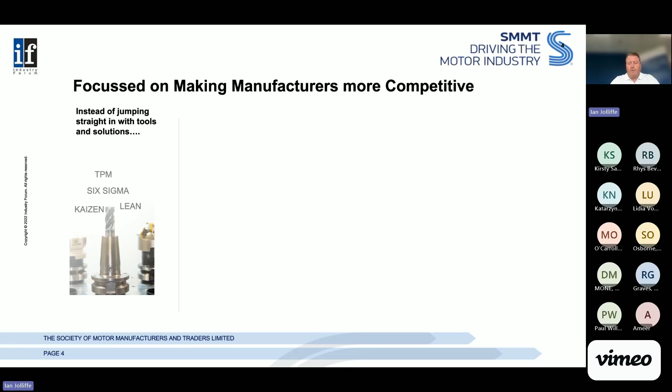So, as a business, our business is focused on making manufacturers more competitive. The kind of tools that we use include Lean, Six Sigma, Kaizen, TPM, but we don't just train in those. Our main focus is to look at how we can use manufacturing as a driver for competitive advantage, looking straight through from the beginning of the process, the competitive strategy and the management systems supported by new product introduction and lifecycle management, getting to grips with the manufacturing operations, and also looking beyond that in terms of the supply chain. So understanding our business suppliers and also measuring outbound logistics and customer satisfaction for business improvement.

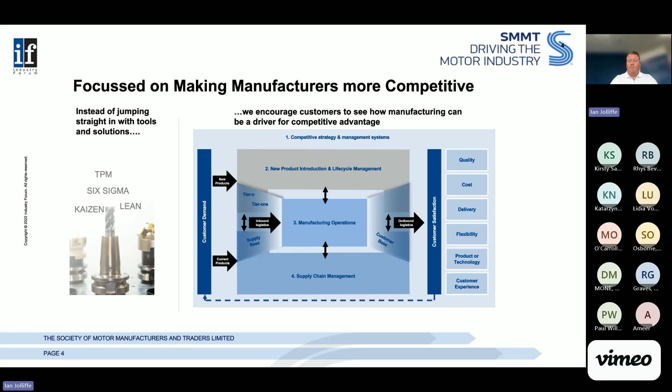As a business, we have four main capabilities: competitive strategy and management systems, new product introduction, life cycle management, manufacturing operations and supply chain. Whilst we provide consultancy and training, the key thing for us is on top of people learning new skills, it's the actual coaching and implementation of those skills to provide business benefits. So it's working with organizations and individuals to make sure we go beyond the issuing of certificates and transfer of knowledge, but also support them through the implementation to make their jobs easier and ultimately their businesses more effective.

And obviously, as a business as well, we are very much involved in the IATF 16949 and VDA quality systems, training and auditing. A number of areas that we deal with, from VDA to IATF to APICS, and as Industry Forum, we deliver consultancy and training under the Quality Management Division brand.

Now, if you're running a manufacturing business in the UK right now, you don't need too many headlines to tell you that times are tough. In the last 5 years, minimum wage has risen in the UK by 40%. Electricity has more than doubled. Gas has more than doubled. Changes to national insurance make it more expensive to employ people. And there's similar disruption and challenges associated with raw material supply, fuel costs, waste disposal, business rates. All of these things tend to be going in one direction and it isn't down.

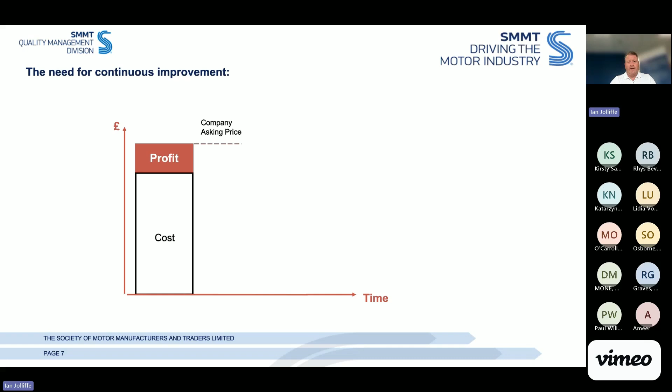Unfortunately, most of us live in a position where the products or services we provide are subject to competition, both domestically and internationally. And as a consequence, instead of a cost plus type discussion we have with our prospective customers, quite often it's a cost down discussion whereby there are other companies in or around the world that say they can do what you do for the same sort of money, which has the effect of depressing the price.

Now, in order to make similar levels of profit, we need to address our costs. And this is what this is all about, trying to understand where our costs are and what we can realistically do to manage them. Going forward, the general price pressure tends to be downward. So people generally want to pay at least the same as, if not less than they did last year for the same goods or services.

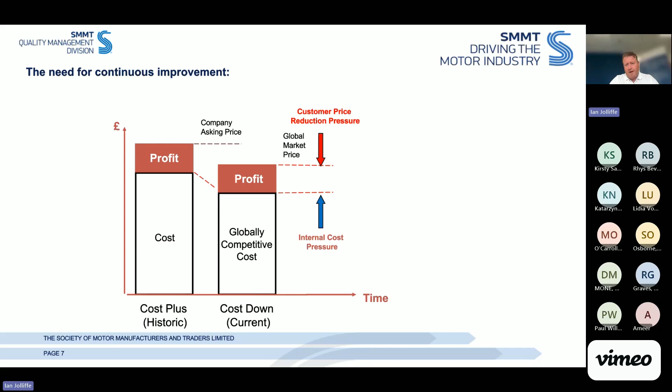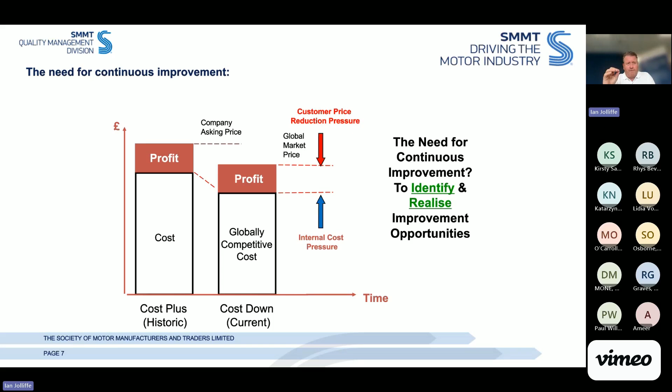During that time, our internal cost pressures rise. We talked about the increase in national minimum wage. We talked about the increase in utilities, gas, electric, fuel, all of these sorts of bits and pieces. So that is where all of our margins come under significant stress. And the need for business and continuous improvement is to help us identify and realise improvement opportunities. That is the very crux of what we do, particularly within operations management.

Our common approach was developed in the late 1990s through, at the time, the only time that Honda, Nissan and Toyota worked together. So what we did over a period of years was develop a common approach based on the Honda, Nissan and Toyota production systems, which basically is summarized by a little temple of continuous improvement here. The Plan, Do, Check, Act cycle, the Deming Wheel continuous improvement cycle, is fundamental to what we do, but so are the building blocks: at the very foundation, 5S, 5C, or workplace organization, supported by process analysis, 7 or 8 wastes, supported by visual management and standardized work.

Now, we focus on these because regardless of the industry that you're in, these building blocks will have a significant impact on your ability to control and improve your processes. And as an individual, I've worked across automotive, aerospace, ceramics, vehicle recycling, food industry, all of these places. All of them are very much applicable when it comes to workplace organisation, process analysis, visual management, and standardised work. So these bits work wherever you go. There are some specialist bits relating to maybe problem solving, line balancing, setup improvement. All of those build on these 4 basic building blocks.

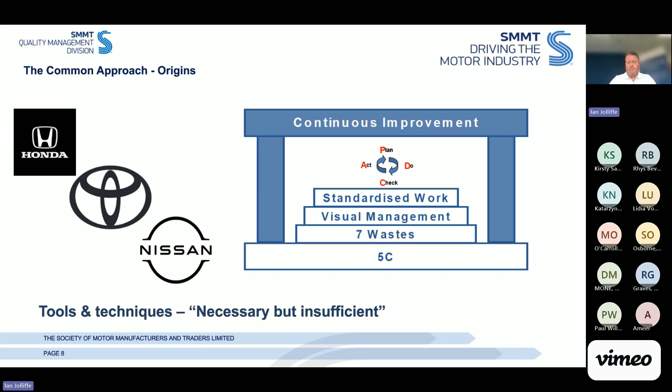And it was something that one of our previous chief executives identified 20 years ago, that the tools and techniques of business improvement are really important. They are necessary, but in themselves, they are insufficient. Beyond that, we need to develop operational leadership and understanding of what's going on and the capability of our people in order to put us in the best place for long-term survival.

Very simply, I like to think of management as made up of 3 key characteristics. First off, we need to understand what's happening. Once we understand it, we can control it. And once we've got control of it, we can look at making improvements.

So we need accurate and as close to real-time data to support objective understanding of what is actually happening at the moment. That's the first thing that we must make sure that we do. Secondly, once we've got a full understanding of what's happening, we can put some controls in place. And finally, once we've got that control, we can look to implement improvements. If we don't have an understanding and control, the improvements won't last.

They won't be what we would consider to be sustainable. They'll work as long as somebody's keeping an eye on them, but as soon as somebody turns their back, it goes back to what it was previously, unless you get those first 2 bits of understanding and control in place.

Our common approach was based on 4 philosophies. That is, we're here to make money. We're here to keep the customer happy, involving everybody in the improvement process, and finally cascading the know-how for continuous activities. So we go from that kind of activity-based improvement activity to something where it becomes part and parcel of our normal day-to-day roles. Once we get that, ultimately, that's where we want to get to.

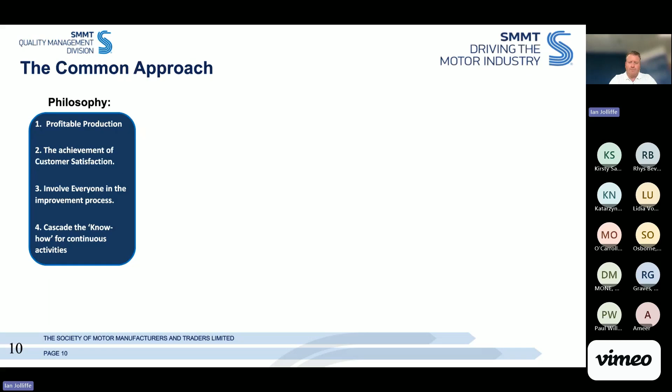This obviously comes through in our building blocks. We have some spirits of business improvement that I'll come back to later on. And finally, the output is measured in terms of, or was measured in terms of, the 7 areas of competitiveness, focusing on quality, cost, and delivery.

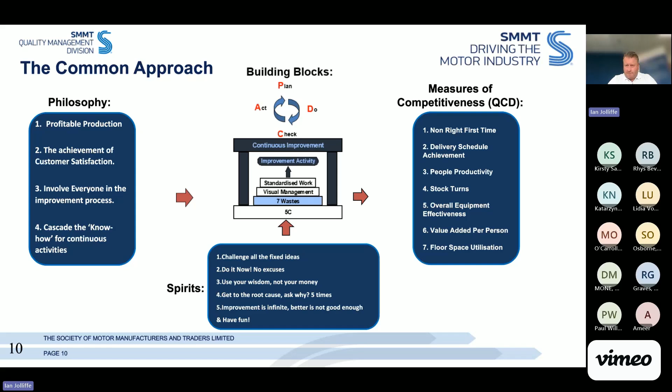Thinking of key performance indicators, every business these days has, or certainly should, and if they haven't, they're in big trouble, an understanding of what is going on in their business from a key performance indicator perspective. As a consultant back in the early 2000s, we worked closely with what was then the Department of Trade and Industry, and part of our role was to deliver measurements against these 7 measures here.

But mainly it was focused on not right first time, the quality, people productivity, the cost and delivery schedule achievement, the delivery aspect of it, in addition to, if there's an automated process, the overall equipment effectiveness. But what we have found is that obviously this information tells you what's happening. Provided it's good data, it can help drive good decisions at an operational level.

It's absolutely vital to understand what is actually happening, and if you're making changes or improvements, to see whether those changes or improvements are having the desired effect. It's important to use real data and numbers. Quite often, KPIs can be manipulated in order to present a picture that's convenient for the author, not what's actually happening. You've got to be really, really careful about that.

In using your key performance indicators, it helps you set realistic targets and improvement plans and understand how you're performing against those. And like I say, it needs to be monitored as close to real time as possible. When I started in industry in the 1990s, I remember we used to work for a week, roll up the numbers on a Monday and publish them on the following Tuesday. By that time, the whole week had gone, and anything that had gone wrong, there's nothing we could do about it.

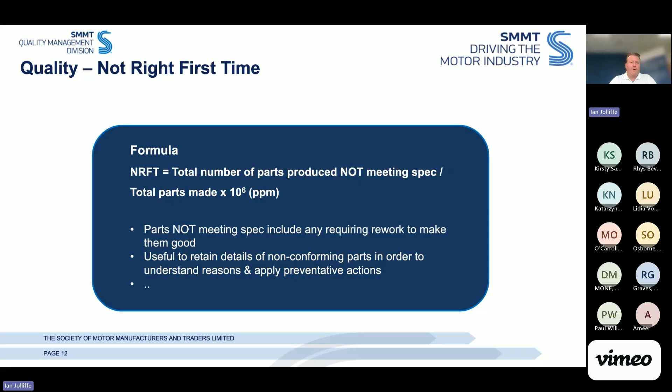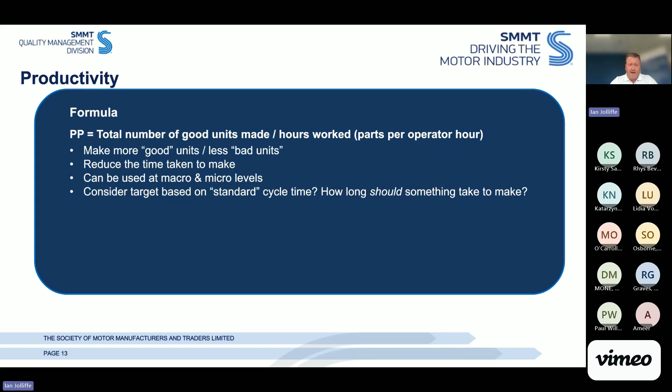If you have a standard cycle time, it helps you understand how long something should take to make in terms of a batch, so you can plan the work coming up, and we'll come on to that again later, because it's really important to make use of available capacity.

Also, within the hours that you use in the calculation, it's interesting. Some people say, should we only use the people involved in the process, i.e. the direct operators, or should it include indirect operators such as team leaders, setters, maintenance people? The fact is, whatever you do, you need to be consistent. I would suggest that you definitely include direct and any local leadership. But if you're not going to include things like logistics and maybe maintenance, make sure their effectiveness is measured somewhere else, so it isn't secret, it isn't invisible, but something you can manage.

The other one is whether you should use net or gross rate for any overtime hours or shift work hours that are put in place. So, for example, if your business pays overtime at time and a half, should you use 1.5 hours rather than the standard 1 hour for it? Again, I say be consistent.

Always, from my perspective, it's about making sure you use numbers to understand what's happening and drive improvement. They are not there to give you an easy time with your boss. If there's a problem, he or she needs to know, and what it is you plan to do about it. So, one of the things that we always look at, even though these numbers are quite basic, is digging into them to check that the measures being displayed are real rather than imaginary or manipulated.

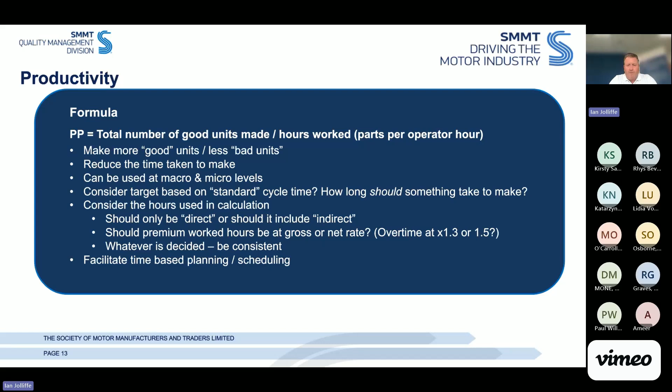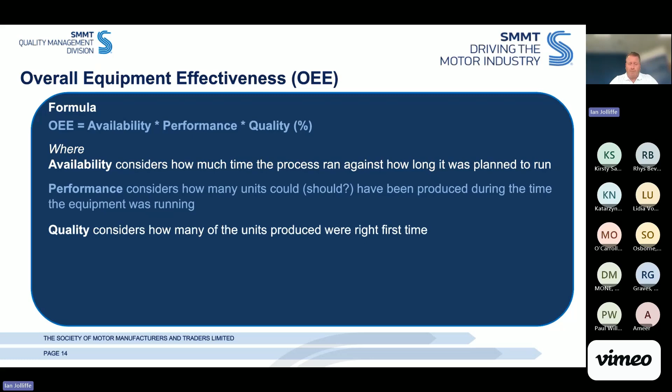When it comes to performance or any of these elements, it shouldn't be possible to have any element over 100%. That's the first thing we look at, when people modify or manipulate the performance figures to give them a decent number. If anything comes out at over 100%, it's not a real number. And as you're multiplying each of these together, if each of your elements is at 85%, your OEE is not 85%, but 85 times 85 times 85, which comes out at 61%.

The reason behind this is it helps you drive further improvements, whether it's availability, which is typically breakdowns and changeovers. Performance tends to be influenced by lots of short stops, and obviously quality, where you pump in the numbers that we got from our not right first time calculation earlier. OEE is really helpful, more and more so, but it requires robust and accurate data.

There's lots of people who go straight to automated shop floor data collection, but for me, understanding the manual capture before you do that is really important. So you don't become a computer says no or computer says yes kind of business. You understand what's going on. You're making sure that the automation is collecting the right information.

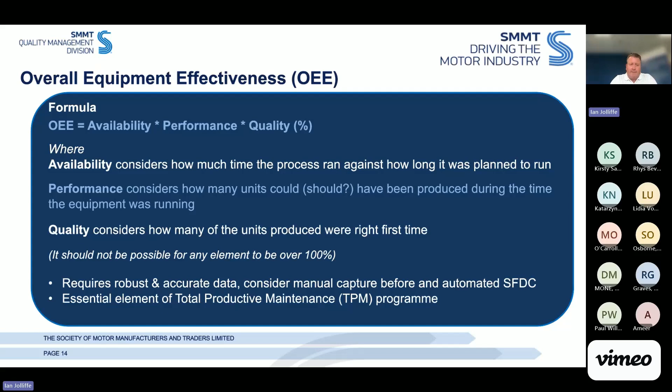There are some great products out there that clip onto your machines that help you understand when things are running and when they're not. Which is great at a certain level, but beyond that, it requires some kind of interaction with an operator or professional to say when it isn't running, why it isn't running, and to get to the bottom of that, because those are where your opportunities are. And if you're engaging in a total productive maintenance program, then OEE is an absolute cornerstone and essential element of any of those kinds of programs.

Finally, delivery schedule achievement. It's the number of failed deliveries divided by the total number of scheduled deliveries. Failed deliveries can include things that are less than the order quantity or delivered early or late, particularly if you're delivering to a production line. You will have a slot in which to deliver. They will turn you away if you turn up early because they're just not geared up to take those sorts of things. So it's really important to make sure you understand that. There is debate as to whether each delivery is considered individually or as a volume or quantity of items.

So if you deliver one delivery of 100 parts, is that 1/1 or is it 100 over 100? Again, whichever you do, be consistent, but I would suggest using both, because if you have a product volume variety mix where you deliver a reasonable number of high volume orders, but also a reasonable number of low volume orders, you can keep an eye on whether you're doing well at both, because typically the high volume orders will bring in more cash, but there may be more margin in the smaller stuff. So you want to make sure you're keeping an eye on both.

It's most often used to measure external performance. So your customers will be measuring you, you'll probably be measuring your suppliers, but it can also be measured internally. So it's helpful to try and set up some kind of scheduling and performance management of how well internal supply chains are performing in order to drive team working, collaboration, and ongoing improvement. And obviously, you need to understand any kind of details for any failed deliveries in order to make future effective countermeasures.

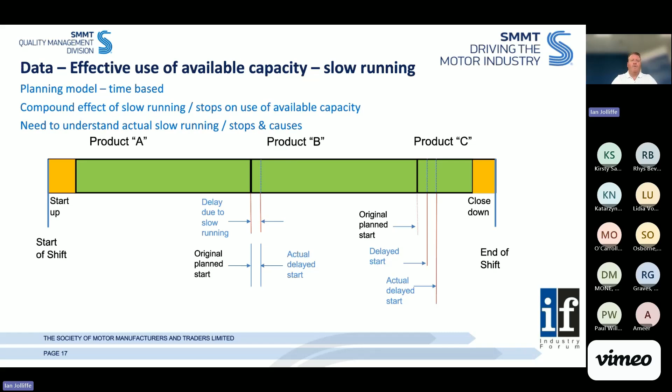The importance of this is to understand any issues relating to delays, which could be slow running. And obviously over a day, if you're making 3 or 4 different parts through a single resource, the compound effect of these kind of slow running can have a significant impact on the available capacity that you've managed to use, and you also need to understand the reasons for that kind of slow running.

Similarly, you can have short stops in there. Typically, if something is stopped for less than 2 minutes, people don't tend to note it. But if you have 30 of those in a day, they can be very significant. So trying to think about how you can capture those, be it manually or automatically, and then the bigger kind of changeovers or breakdowns. The reason that we want to be looking at these sorts of things is that we typically would be looking at single minute exchange of die or changeover improvement type activities to support this, and the obvious comparison is the Formula One and motorsport pit stops.

Now, those guys have spent the last 30 years refining that kind of process. They have very deep pockets when it comes to budgeting and the amount of people that are there, and they are extremely good at what they do. The internet is full of great examples of how four wheels are changed and some fuel thrown in there, and the car's within 4 seconds in and out. However, that wouldn't happen if there wasn't effective communication and planning going on. There are also some interesting elements on the internet available when cars pull into pits and they're not expected, and it's not quite the same professional story that you are used to.

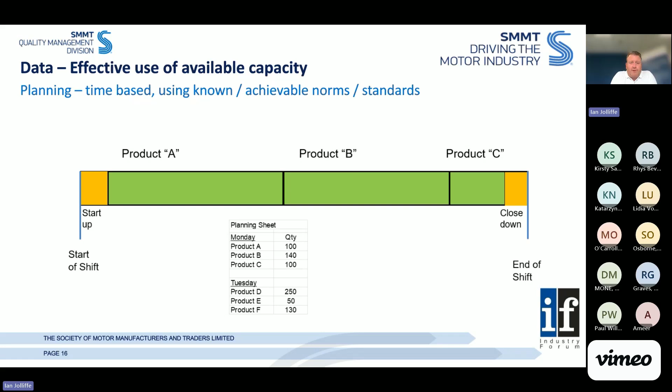You've got to ask yourself, if we're in a situation where we're changing from product A to product B, by the time product A finishes, we need all of the tooling, information, material, and anything else required delivered at that time in order to minimize the times. What we don't want to do is wait for product A to finish, operator to wander off, go and find the details of what's happening next, and then start thinking about pulling together all the information. It's relatively simple, but there's a lot of it that needs to happen.

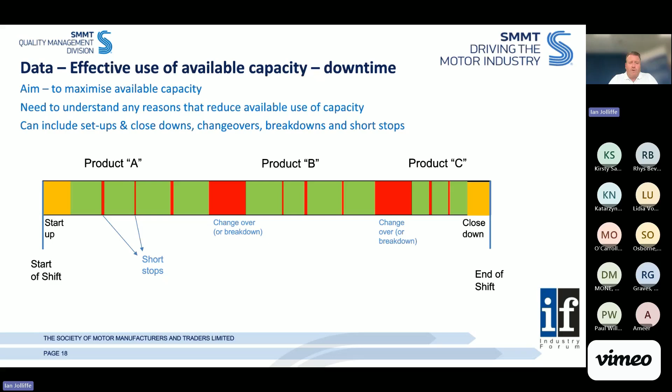And similarly, if you've got a machine and you've got startup and close down at the end of each day, you want to make sure that there is an element of standard work that supports these things and it's done in the right time to the right level every day, because once we've lost that capacity, it's very expensive to get it back, if you can get it back at all.

So we talk about vital signs. Historically, as a business, we've always recommended you look at quality, cost, and delivery as the vital signs for any business. The reason is if you get them wrong enough for long enough, the business dies. I think, however, in modern businesses, we look at more data. Gone are the days of simple quality, cost, and delivery; although important in their own right, they're insufficient.

We also now have the elements of health, safety, and environmental aspects that we need to look at. So typically, most businesses, instead of just having QCD, it will now probably be HSE QCD. So we're looking at the health of our workforce, the employee well-being and welfare. We're looking at safety, we're looking at accidents or near misses, we're looking at days since last incident, those kind of things. Or environmental, it could be pushing towards carbon footprint, recycling rates, waste management, all of these sorts of bits and pieces.

So now we're very much in a situation where a balanced scorecard is not just quality, cost and delivery, but it's also health, safety and environmental aspects as well. KPIs provide great visibility of what's currently happening and what has happened, and it is essential for real understanding of the process in order to have that.

However, if you're only reliant on what's happening now and what's happened in the past, it's a bit like trying to drive your car using only the dashboard display and the rear view mirrors. Key activity indicators are a way to help look forward as we kind of process through business.

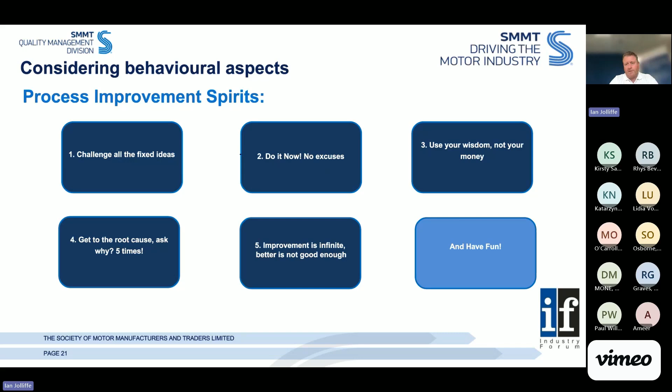And the last one, anyone who's worked on projects with myself or the rest of my colleagues, it is important that people enjoy the process. If people succeed in making things better but hate every second of it, they're less likely to support any future programs. The culture that you have within a business needs to support the individuals and the people that are working within it. So I think it's really important that we can get together and enjoy what we do.

So the key activity indicators, these are things that drive behaviours that influence outcomes. Ultimately, what we're trying to do is develop a healthy culture focused on success. These can include audits, checking workplace organisation, good old 5S, 5C check sheets, audits of the quality systems, checking product quality, doing layered process audits to make sure that all the right things are being done. It's driving behaviours that have an impact on the processes and the relative effectiveness of those processes.

Understanding employee engagement, having decent feedback forums, suggestion schemes, one-to-ones, business briefings, all of these sorts of things are really important.

So, frequent one-to-ones, making sure you have the time, you invest the leaders' time with their people to understand how they're getting on, and whether there's anything that can be done to support them any better. I think quarterly business briefings are sensible to make sure that the individuals understand how well the overall business is doing and where the challenges are and where they fit into it.

But again, a lot of this stuff will come into something I'm going to mention a bit more later, is the quality of the capability of the leaders that we have at an operational level is so important. Reward and recognition. Celebrate successes. I think it's really important to focus on achievements relating to quality, cost, delivery, or health, safety, and environmental. It doesn't necessarily mean that you have to pay people for it. Sometimes it's helpful, but just the reward and the recognition aspect of it as well is that it's really important to celebrate success, praise in public, and if there's any challenges, you discipline in private.